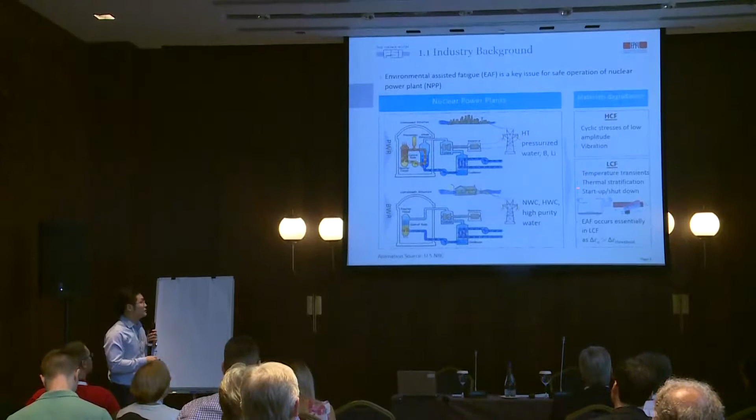As we all know, the pressurized water reactor and the boiling water reactor are the most commonly applied reactor types in commercial usage. Components like pipes, surge lines and valves work in high temperature water, mainly fabricated with austenitic stainless steel. In field experience, fatigue is the main reason for component degradation. Vibration-induced low stress or strain amplitude induces high cycle fatigue, while temperature transients, thermal stratification, start and shutdown induce low cycle fatigue.

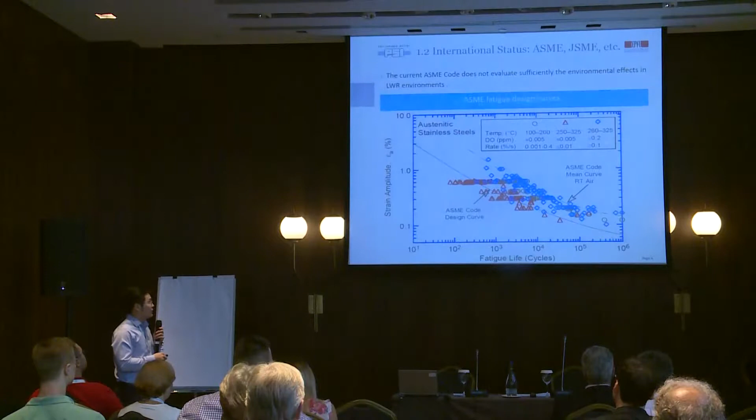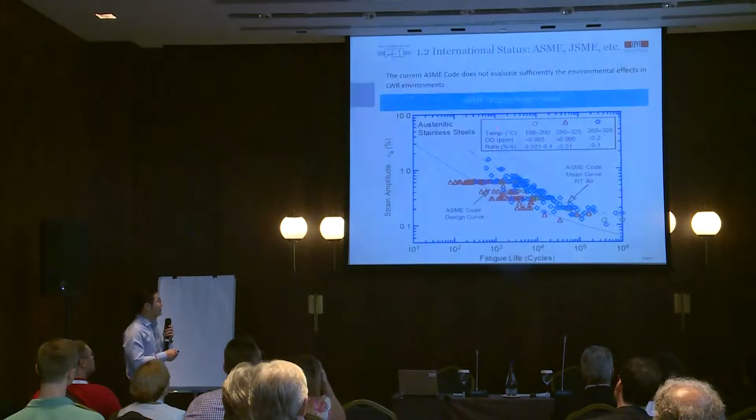The ASME design curve is the most commonly applied method to evaluate fatigue life in austenitic stainless steel. A correction factor between the design curve and the mean curve has been introduced to add conservatism to the fatigue life design. However, in this diagram, we can see some red triangles fall at the left side of the design curve. That means the ASME design curve is not conservative enough to evaluate the fatigue life of austenitic steel working in environments where temperature, strain rate and strain amplitude meet the threshold concomitantly.

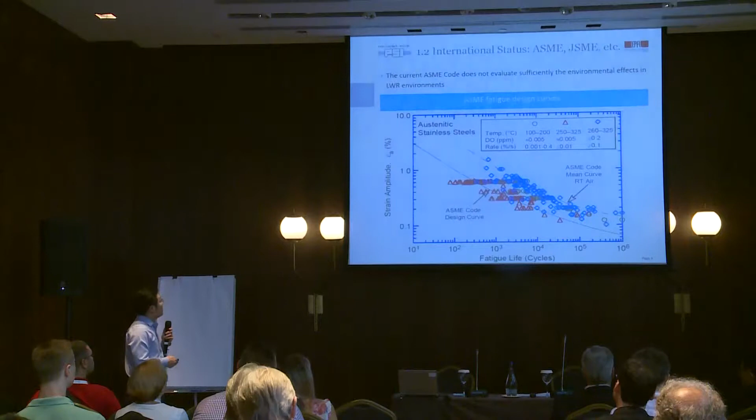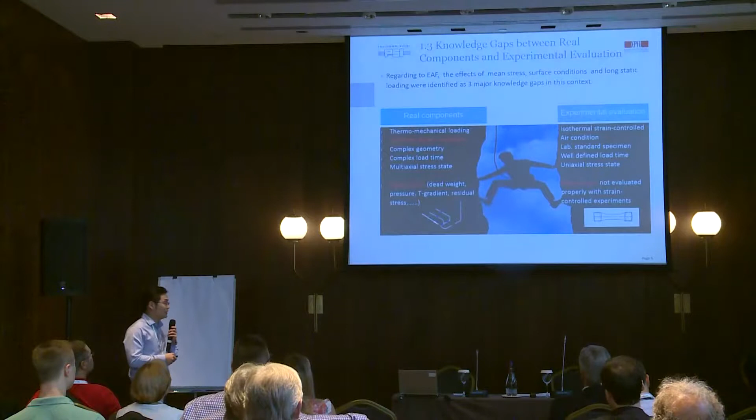The current ASME design code and NRC design code take temperature, dissolved oxygen and strain rate into consideration. However, we found this is not enough — mean stress, specimen geometry, non-isothermal cyclic loading, and surface finish also have potential influence on environmentally assisted fatigue and are not sufficiently understood. In this study, I will mainly focus on the mean stress and its cooperative effect with the environmental effects on environmentally assisted fatigue.

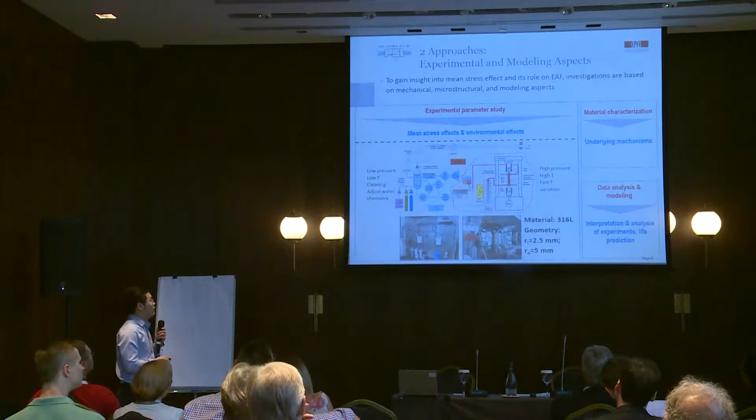In the research approaches, both experimental and modeling works are involved. The fatigue test is mainly conducted in this kind of facility, which consists of a light water reactor environmental simulation loop and a fatigue test machine. This is a picture of the simulation loop part, and this is a picture of the fatigue test part.

This is normally the low temperature side, here is the high temperature side. The applied material is 316L austenitic stainless steel, using a standard cylindrical hollow specimen with a geometry of 2.5 mm inner radius and 5 mm outer radius. The specimen was heated from the inner side by high temperature water, and the strain signal is measured by an extensometer attached to the specimen surface.

A sinusoidal waveform with frequency 0.17 Hz is applied, and most tests are controlled under load control. In this presentation, only the experimental fatigue test results will be presented. If you are interested in other parts like materials characterization and data analysis modeling, we can communicate after the presentation.

First, I will introduce the mean stress effects on the SN curves — actually, the mean stress on fatigue life. By now, 66 tests have been performed in room temperature water, high temperature water, and high temperature air. Actually, it is quite an expensive test and quite time consuming.

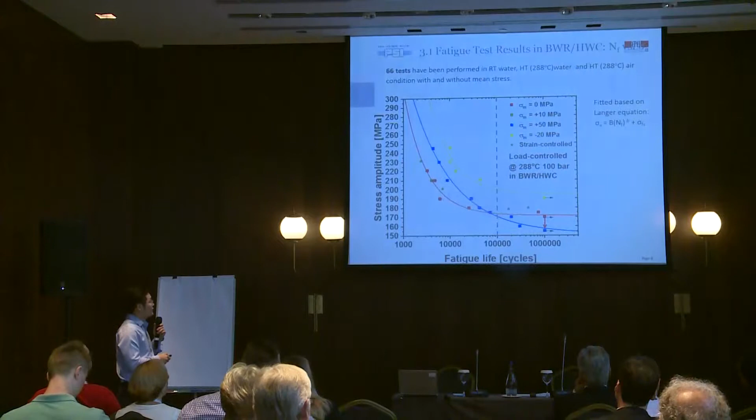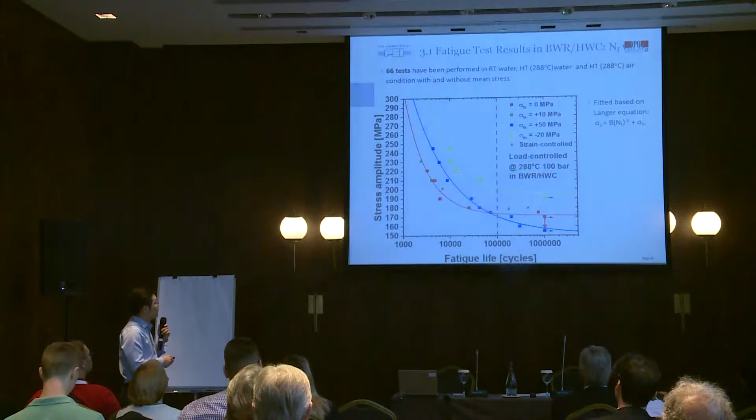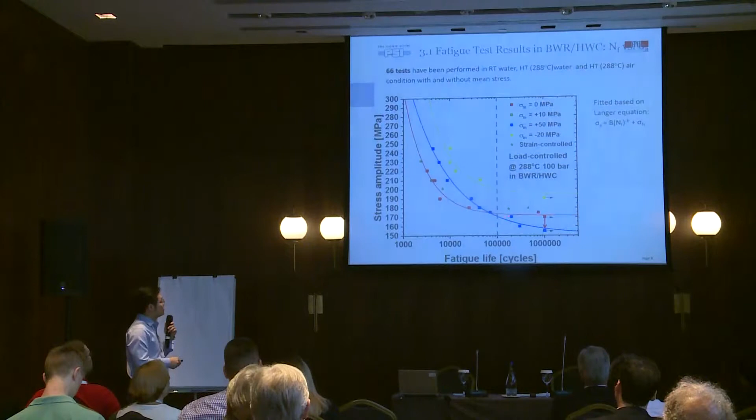In the left region, we found that both positive and negative mean stress have increased the fatigue life. On the right, high cycle fatigue region, we found that positive mean stress has decreased the fatigue life and also the fatigue limit. On the other hand, minus 20 MPa has increased the fatigue life and fatigue limit. We also found the strain control test results correlate well with the load control test results, and the curve is fitted based on the Langer equation.

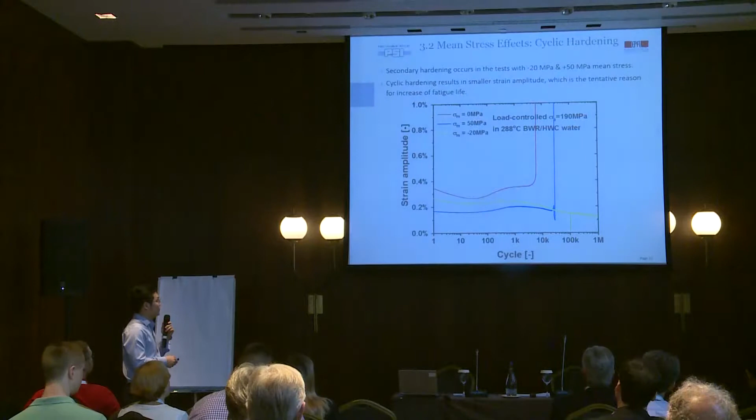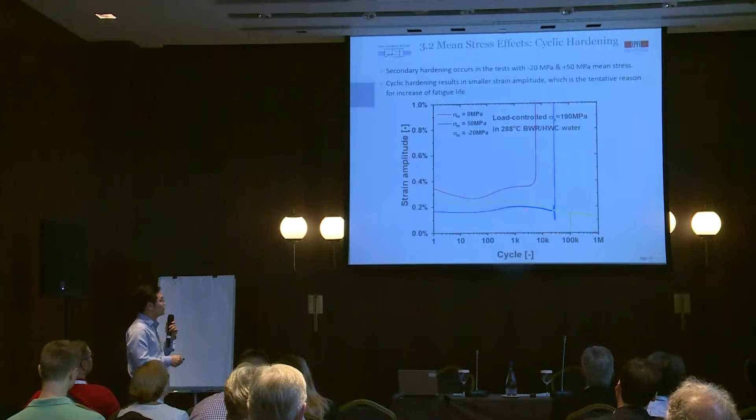If we take the test result example with stress amplitude 190 MPa in high temperature water, this is the strain amplitude corresponding to the loading cycle. We found that the test with mean stress has undergone two phases of hardening: the first hardening and the second hardening. Especially the test with minus 20 MPa has the most pronounced second hardening. The second hardening results in smaller strain amplitude, which is a tentative reason for the increase of fatigue life.

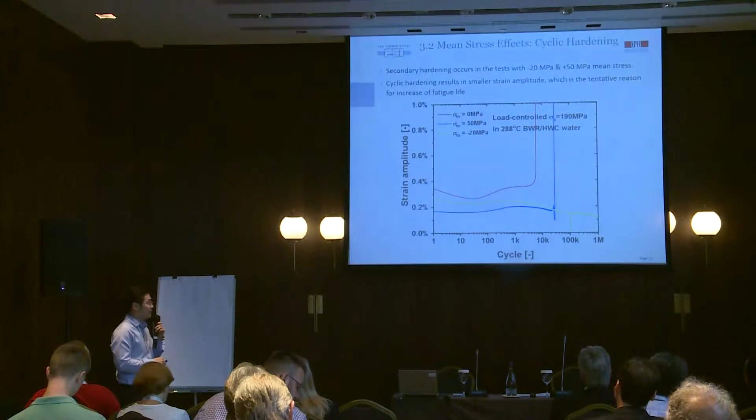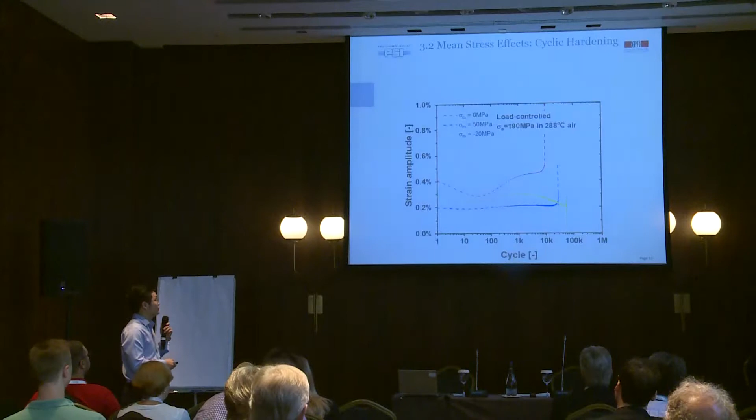This is also an example with stress amplitude of 190 MPa in air. It also has similar strain evolution in the air condition.

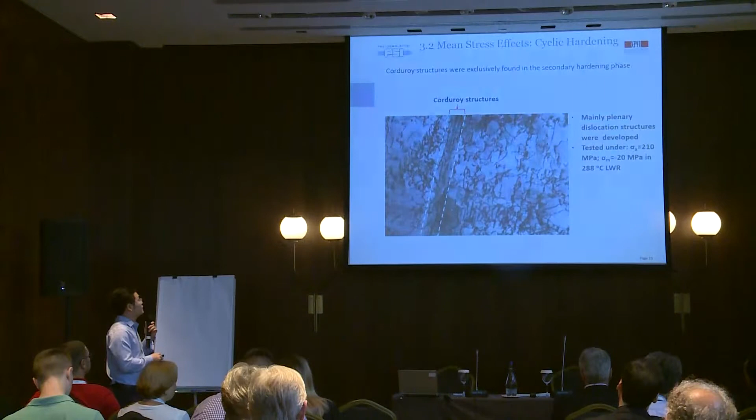So we want to have a more in-depth understanding about the mechanism of the mean stress effect on the second hardening. We cut the test specimen after testing to check in the TEM, EBSD, and ECCI, and I take an example picture. This specimen was tested with stress amplitude of 210 MPa, mean stress of minus 20 MPa, in high temperature water. Many planar dislocation structures were developed, and corduroy structures were exclusively found in the second hardening phase. This kind of structure may be responsible for the second hardening.

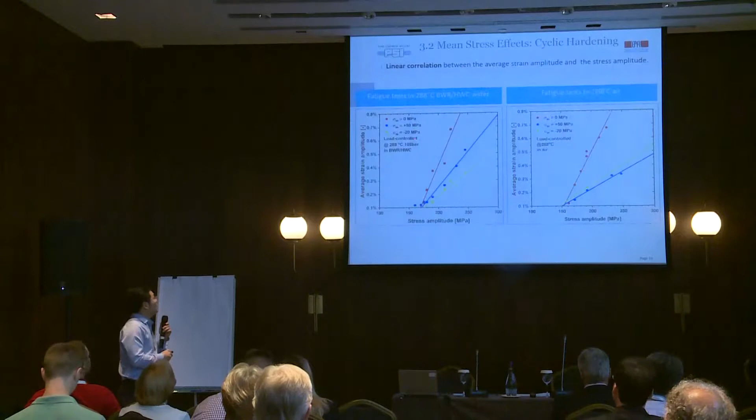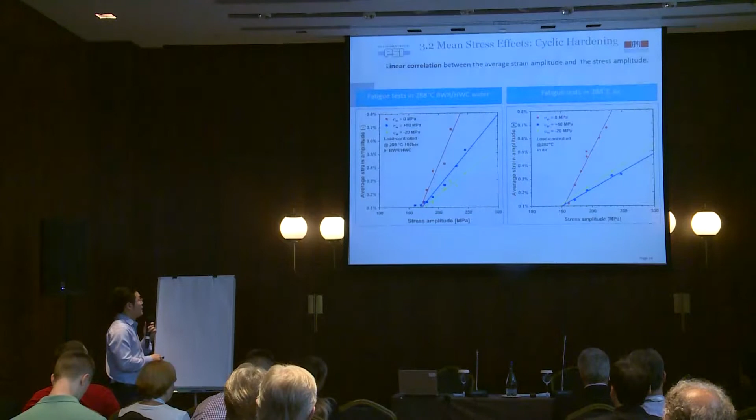If we plot the average strain amplitude corresponding to the stress amplitude, we found a linear correlation between these two parameters. Looking at the slope under different mean stress conditions, the slope with mean stress is smaller than without mean stress, which means the mean stress has hardened the material.

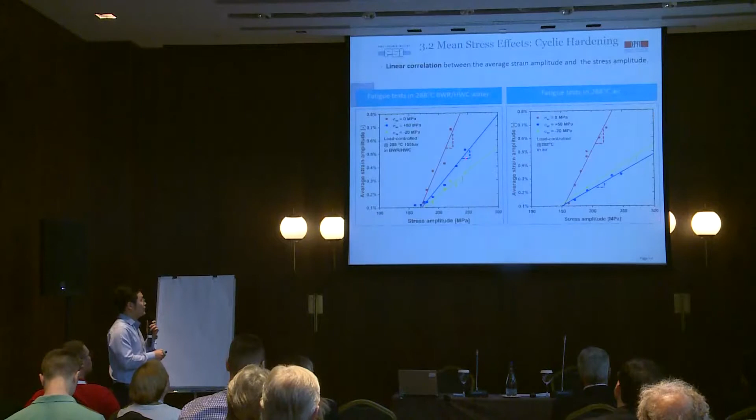If we compare the slope in two different environments, we found that the slope with 0 mean stress and the slope with minus 20 mean stress are almost similar in the two environments, but the slope of 50 MPa mean stress in high temperature water is bigger than in air condition, which is contradictory to the hardening and fatigue increase effect of cyclic hardening.

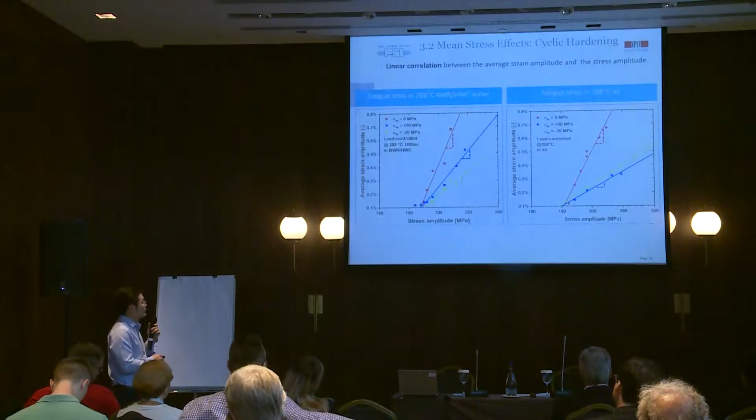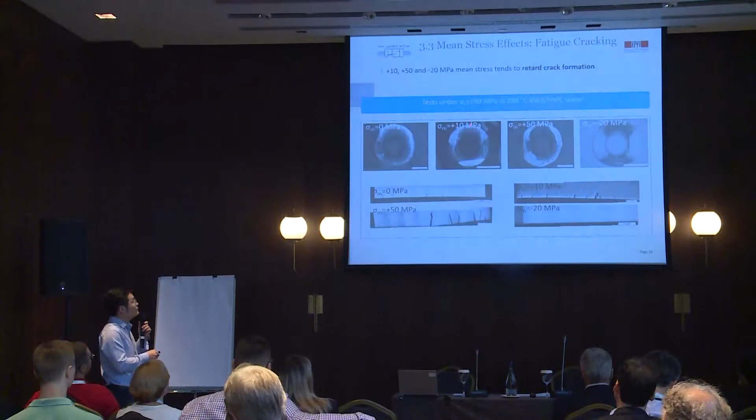The dark area of the right three pictures is smaller than the one on the left, which means 10 MPa, 50 MPa, and minus 20 MPa have a restraining effect on crack formation.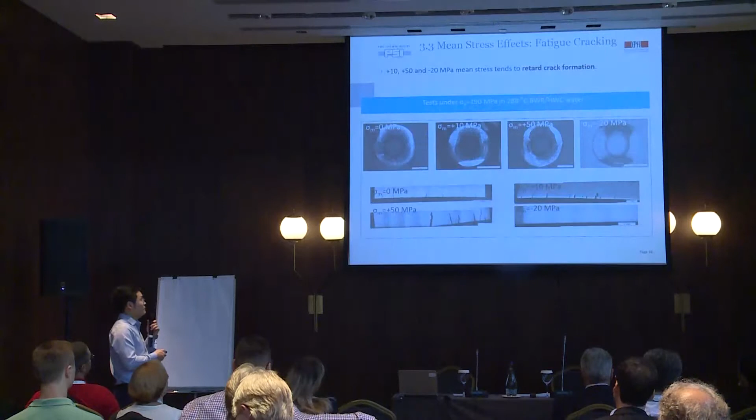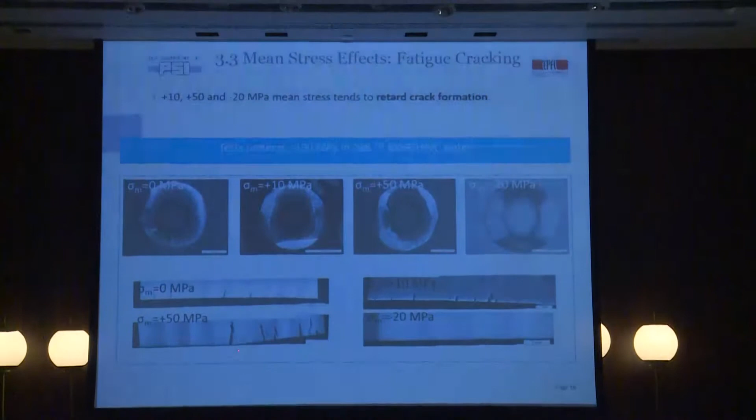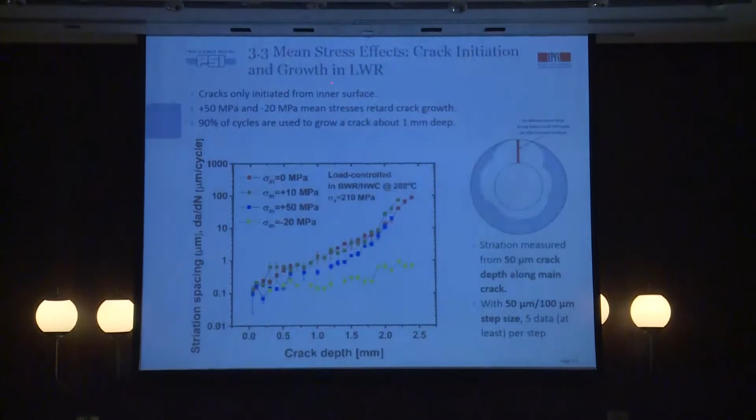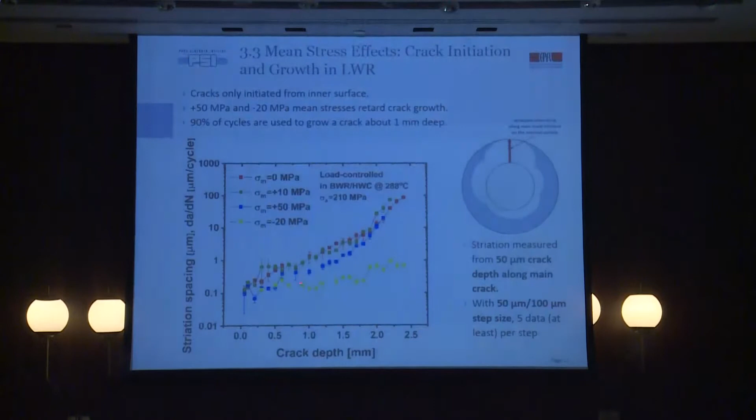To check the mean stress effect on crack initiation and crack growth, we measured the spacing along the main crack of the fracture surface. These two curves are with positive 50 mean stress and minus 20 MPa mean stress. The mean stress has retarded the crack growth rate.

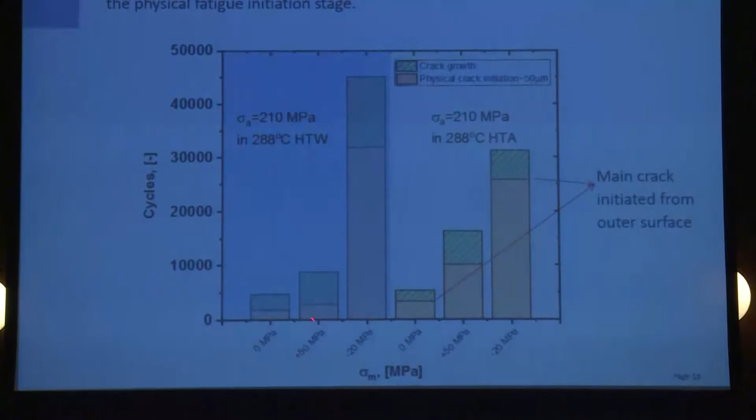With the measured crack growth cycles, we can calculate the physical crack initiation cycle. This is the crack growth cycle, this brown/orange is the crack initiation cycle. Comparing the cycles of two different stages with different mean stress, we found that both positive and negative mean stress have increased the fatigue life cycle in both stages.

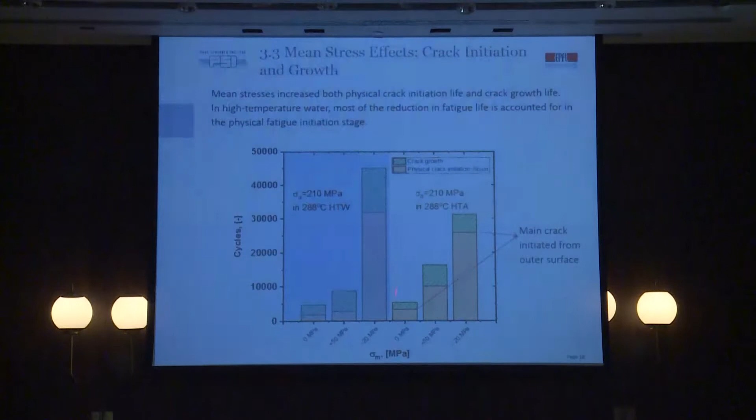Similar phenomena were also found in the high temperature air condition.

After gaining a phenomenological understanding of the mean stress effect on fatigue life, cyclic hardening, and crack initiation and growth, we wanted to correlate the mean stress and try to predict fatigue life. We applied conventional mean stress correction models like the Goodman model and Gerber model, and found they fail to correlate our tested fatigue life with mean stress.

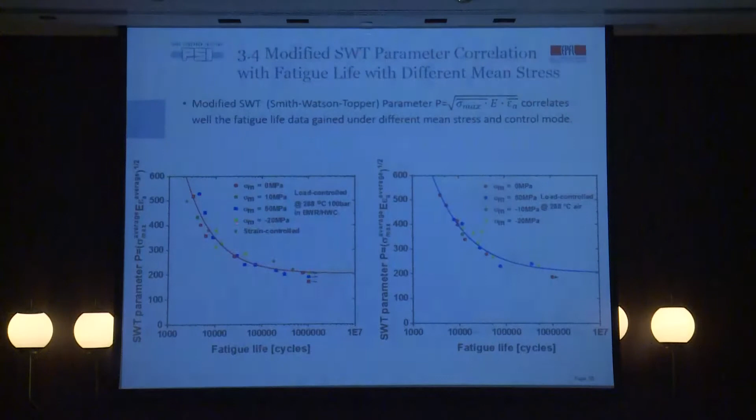So we modified the SWT model parameters, coupling the maximum stress and the average strain. From these two diagrams in the two different environments, high temperature water and high temperature air, we found this modified SWT parameter correlates the fatigue life data with mean stress and different control modes well.

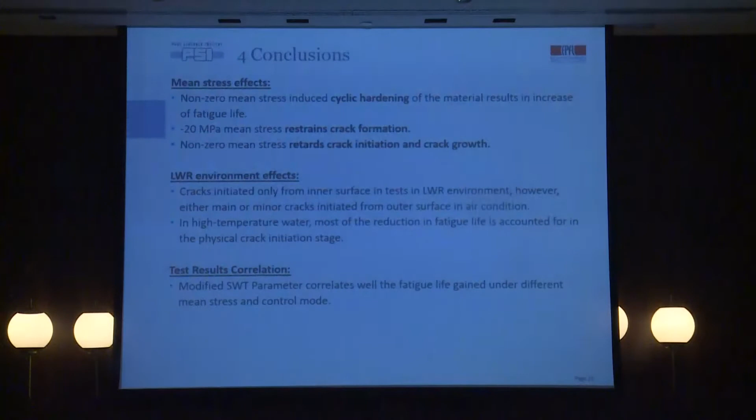Finally, we go to our short conclusions regarding the mean stress effects and the light water reactor environmental effects and the test results correlation.

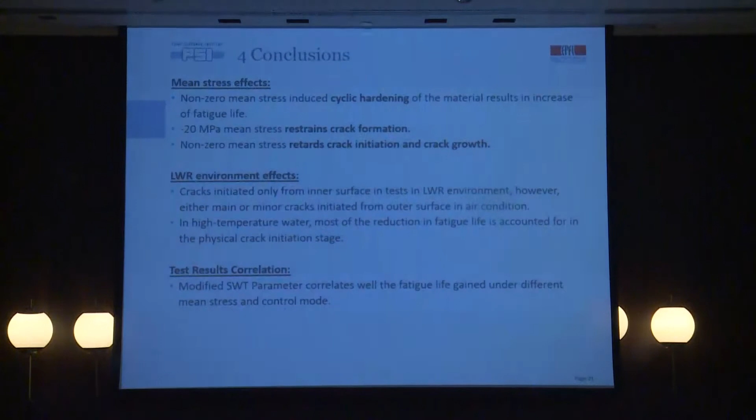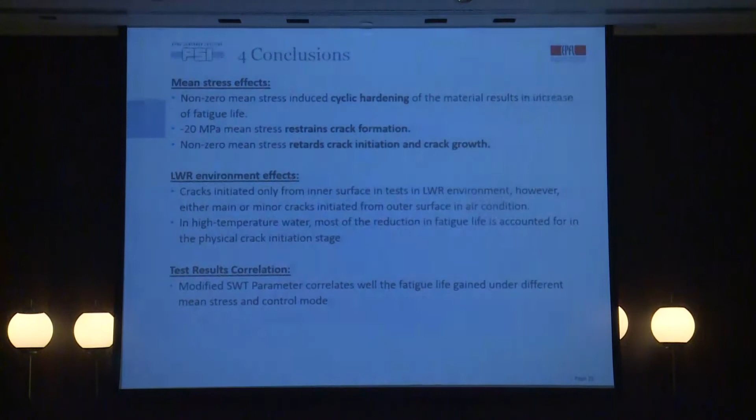We found a non-zero mean stress induces cyclic hardening of the material and results in an increase of fatigue life. The minus 20 MPa mean stress restrains crack formation, and the non-zero mean stress retards crack initiation and crack growth.

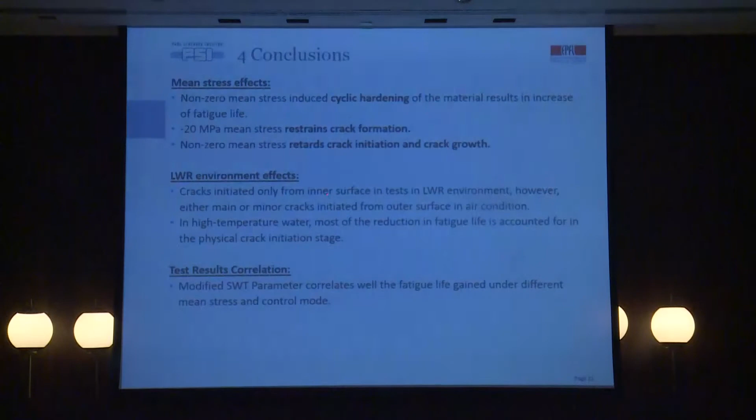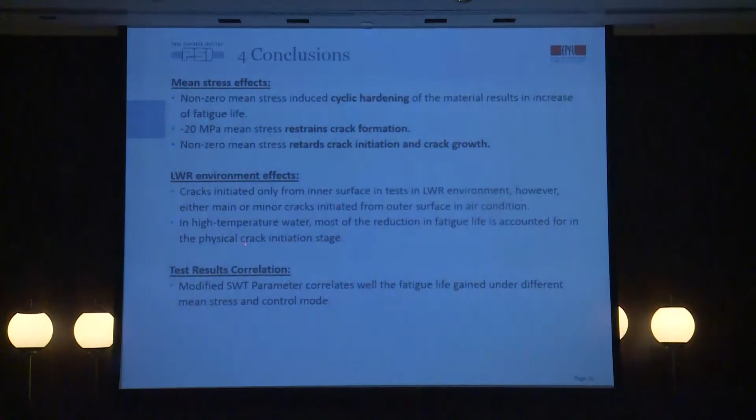In the light water reactor environment, cracks initiate only from the inner surface in tests in the water environment. However, there are minor cracks initiating from the outer surface in air condition. In high temperature water, most of the reduction in fatigue life is accounted for in the physical crack initiation stage.

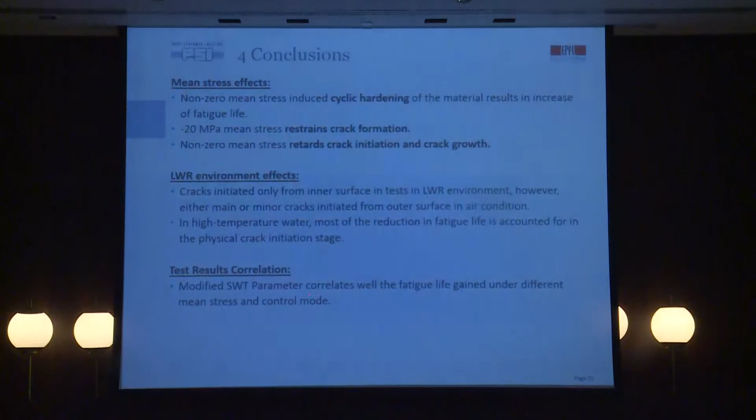And the modified SWT parameter correlates well the fatigue life gained under different mean stress and control modes. Thank you.